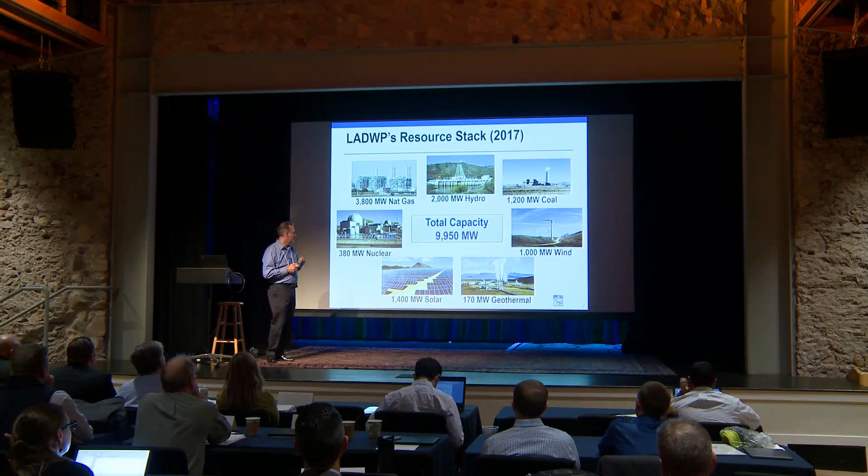Los Angeles LADWP, this is our resource stack here. We have lots of natural gas. Most of our natural gas is in our basin. 4 facilities that we have, 3 of which are along the coast, 1 is inland. And we also have a gas plant in southern Nevada.

The hydro is made up of our Castaic pumped hydro facility, which is a 1,250 megawatt pumped hydro facility. We also have a share of the Hoover Dam, 491 megawatts, and the balance being small hydro on our aqueduct system on the eastern watershed of the Sierra Nevada range. We have 1,200 megawatts of coal.

We did have another 470 megawatts of coal before 2016. We divested of our Navajo plant, so now we have our remaining facility. It's two 900 megawatt units. We have 1,200 megawatts of it currently. That's in Utah. We have 1,000 megawatts of wind. Most of that was procured prior to 2010.

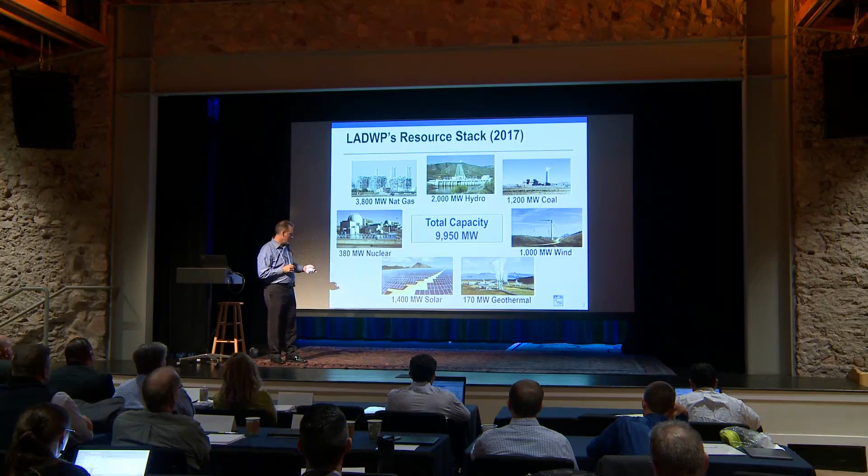170 megawatts of geothermal. Solar has really ramped up this last year. We've added close to 800 megawatts just this last year. And then, of course, our Palo Verde facility here that we have a share of. So this is our transmission and our resources.

Currently, we have about 25% of the California state's transmission. It's outsized compared to the size of our system, which is about 10% of the California load. And we have 2 major HVDC lines, one of which we share with other utilities, goes all the way up to the Columbia River Gorge. Up here we access low-cost hydro resources and wind projects.

We have our Intermountain, on our STS HVDC line here. We have our Intermountain generating station here. We upgraded it in 2011 about 480 megawatts so we could bring some additional wind in here. So we have the Milford, 2 projects there, wind, and also a Pleasant Valley project in Wyoming that we get wind power from. This was our Navajo station that we divested of in 2016.

Hoover Dam, Copper Mountain. This was our first large solar facility that we got experience from, 210 megawatts. And then we had the Moapa Solar, which is on the Indian Reservation, and that's 250 megawatts. Palo Verde is down here.

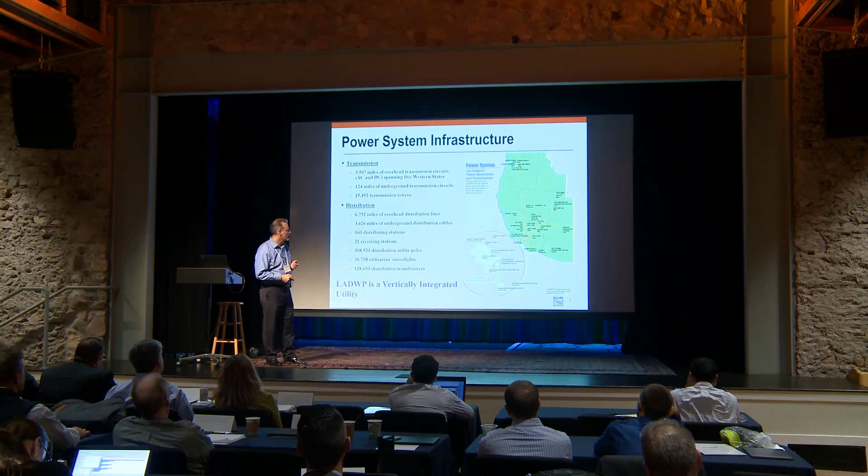We have about 4 million residents in Los Angeles, about 1.4 million customers. About 200,000 of those customers are low-income customers, which have a subsidized rate of electricity. And we have lifeline customers that have health reasons that need electricity. So we have a large number of low-income customers.

These are our major initiatives to reduce greenhouse gases. So we're doing all this renewable stuff really to reduce greenhouse gases. The SB 32 bill required GHG emissions to be below 40% by 2030. That's 40% below 1990 levels.

Our renewable program, we're planning to reach 36% by 2020. The requirement is 33% currently. By 2030, we'll be reaching 55%, which is 5% more than the current SB 350 requires, which is 50% by 2030. And we decided for a stretch goal, aspirational goal of 65% renewable by 2036. And that was something that we self-imposed.

We went out to our stakeholder community. We go through an IRP process every year, and we produce an IRP every year, and we go out to our stakeholders through an advisory committee and also a public outreach process that we do every other year. And we decided on a 65% RPS, primarily to reduce natural gas usage. I'll talk a lot about that in a little bit.

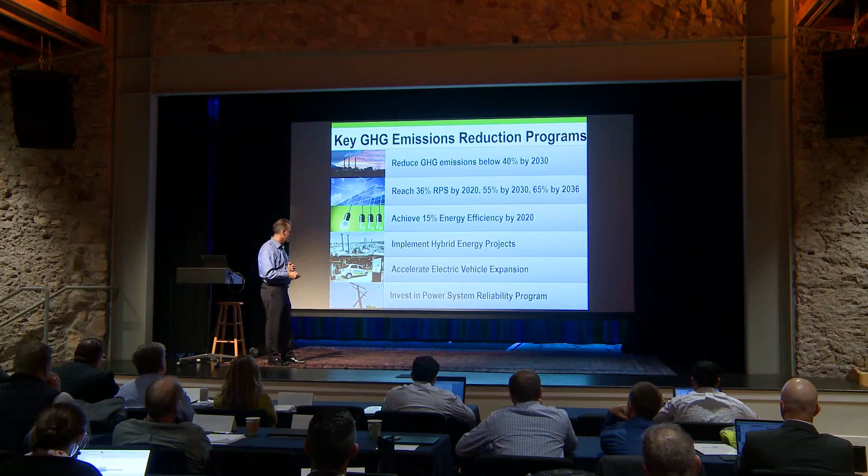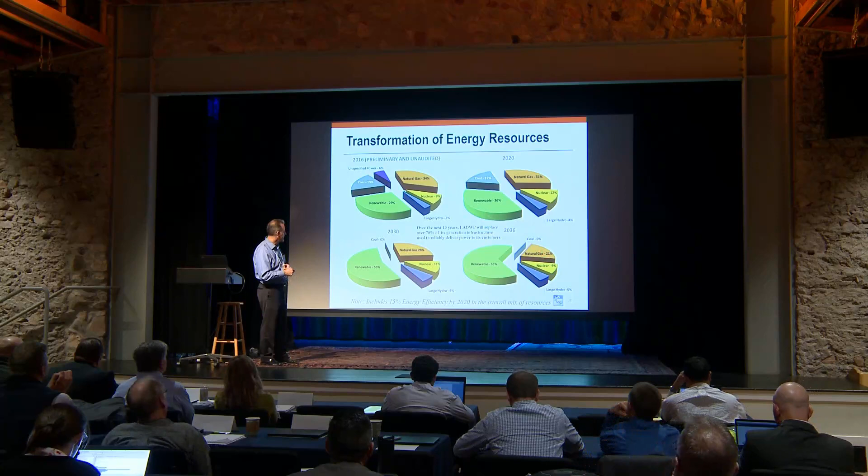By 2020, we're currently at 29% renewable here, 34% gas. And I talked about the 55% and the 65% by 2036 here. Our goal is to reduce our gas usage. And so you can see with the increased renewables that we can get down to 21% of our resource mix with natural gas.

The major laws that are driving all of this transformative change. AB 32 is the California Global Warming Solutions Act. It established a cap and trade program for emissions and credits. We've been participating in that, and we got a free allocation of credits based on our projections back in 2010; if we fall below our allocation, then we have extra credits that we can then sell into the market. So it's a market-based program to reduce fossil greenhouse gas emissions.

Currently, we're at 42% below 1990 levels here, and we're buying short-term credits. But now that we've divested of our coal-fired plants, we now have extra credits.

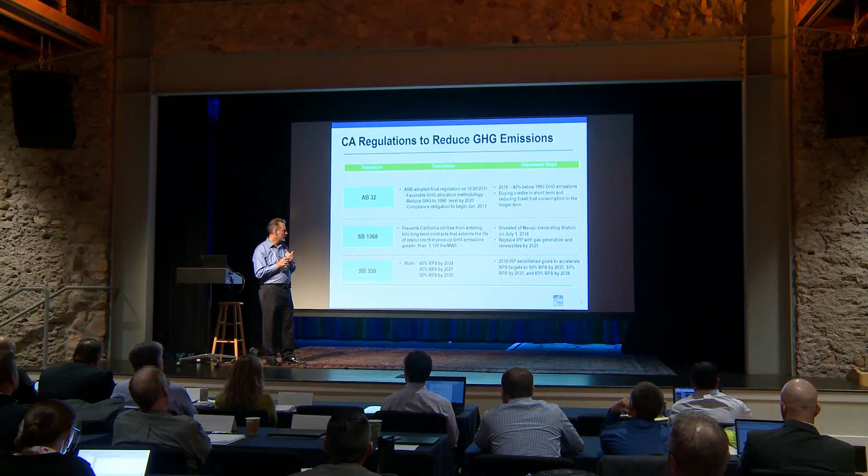SB 1368 prevents us from importing power outside of our system into California if it exceeds 1,100 pounds per megawatt hour of greenhouse gas emissions. That was the major reason why we had to divest of our coal-fired facilities. We decided to accelerate the replacement of those from 2027 for IPP to 2025, and from Navajo Generating Station 2019. Our contract ended in 2016.

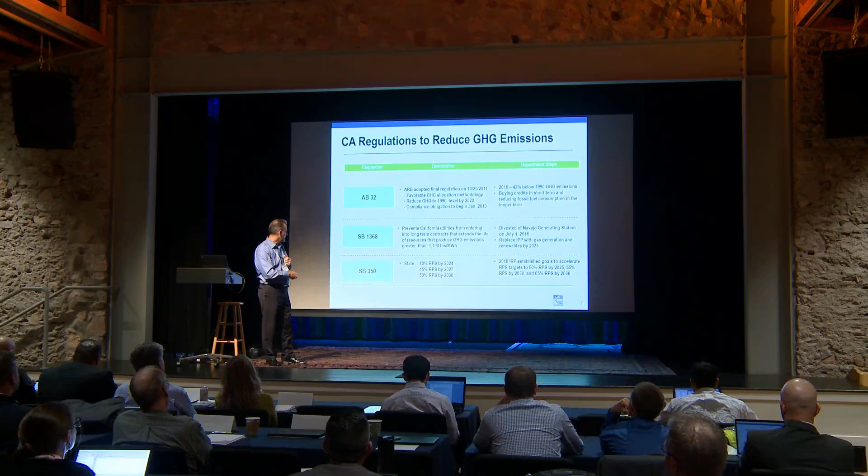And then SB 350 here, we talked a little bit about. So that establishes the 50% RPS by 2030. SB 32, 40% below 1990 levels. We're at 42%, 14 years ahead of it. And this last one here, somewhat related to SB 100, but our city council put forth a motion directing us to determine what investments would be necessary to get to 100% renewable, clean energy.

And we formed a technical vision team this past year. We kicked off a major stakeholder process. Now we're involved with NREL in research projects and talks right now to look at 100%. So that's our long-term goal, is 100% renewable.

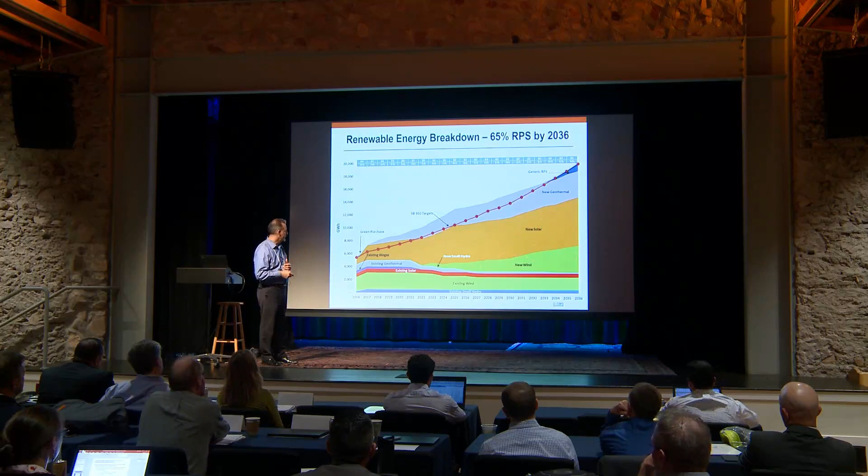This is our renewable energy breakdown, so 65% by 2036. SB 350 stops at about 50% in 2030, so we're going beyond that point. And you can see we have a very diversified mix. We think this is very critical from an integration standpoint, to have a very diversified renewable mix, with diversity in technologies, and geographically dispersed over a wide area.

Our solar programs: we're looking at 4,000 megawatts of solar by 2036. Most of that is large-scale PPA projects that we're putting on our system. Our local solar here is a big contributor. This is the DERs we were talking about earlier. 760 megawatts of customer net metered. We're currently at about 250 megawatts right now. So we have a ways to go, and it will allow net metering to continue in the future.

We don't see extremely high growth rates in net metered solar, primarily because our rates are low. They're among the lowest in the state of California. And also the fact that we're a very dense city environment, urban environment, and it's difficult. Most of our customers live in multifamily dwellings, so it's very difficult to put in net metered solar.

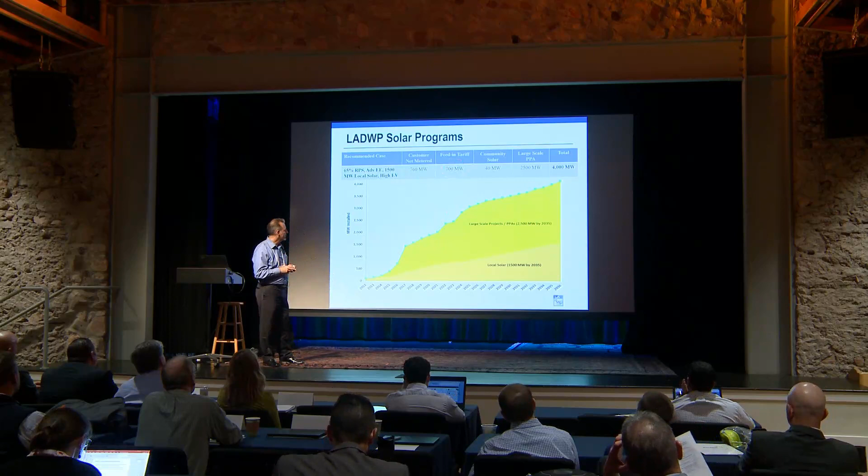We have a feed-in tariff program, so these are basically small PPAs within our territory. And we're looking at expanding that program. Right now it's about 14 cents that we're offering to our customers for that solar.

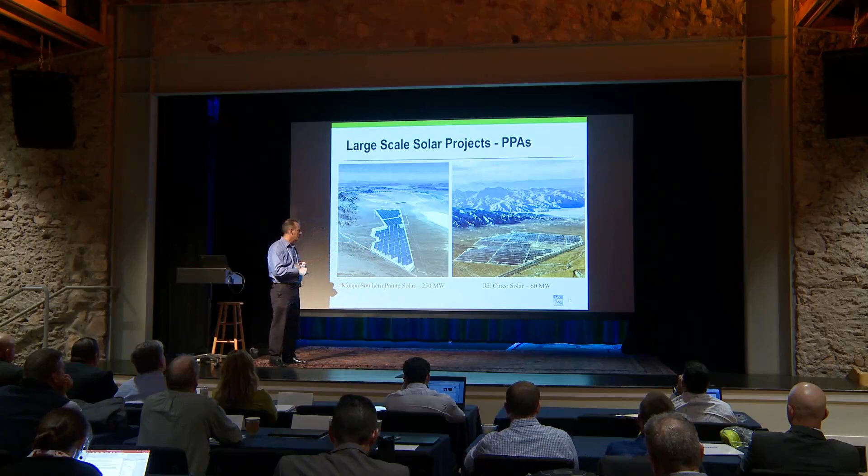So here's our Moapa facility. This is a 250 megawatt project we completed several years ago. RE Cinco Solar, 60 megawatts. This is part of a larger group of facilities in the Barren Ridge area, and I'll show you in a minute. There's about 590 megawatts planned right there currently.

This is the largest feed-in tariff project, we believe, in the world. It's down in the harbor area. I believe it's 30 acres, and it's 15 megawatts AC, the Westmont Solar Project. And I think we offered 13.5 cents for this one.

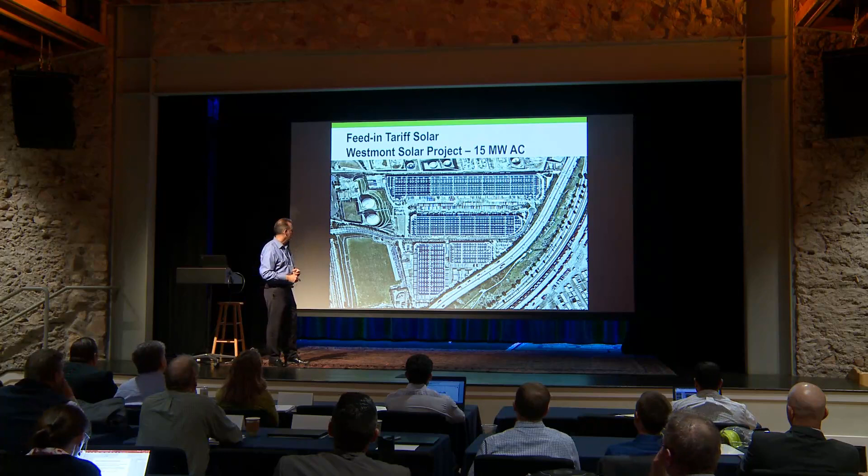So we've been studying renewable integration for years. In 2013, before we saw SB 350 coming out, we were starting to look at 33%, 40%, 50%, looking at those different levels of renewables and what the impact on our system would be from increasing penetration of renewables. There was very little information out there at the time. There were some NREL studies out there that we took advantage of and started to learn from.

Data was very hard to come by, so we had a 50 megawatt facility, Copper Mountain 1, I believe it was, to analyze the variations in that plant.

What we came out with was that a large solar plant, greater than 50 megawatts, is unlikely to experience a bigger than 36 megawatt drop or variation in its output within 1 minute. That was kind of a key finding.

We also learned from the NREL studies that if we spaced our facilities out about 50 miles apart or more, they would have very little correlation between fluctuations in the output of those plants. We were concerned that having a whole lot of plants all together would be creating a lot of variation in our system. Geographic diversity is important, aggregated solar production.

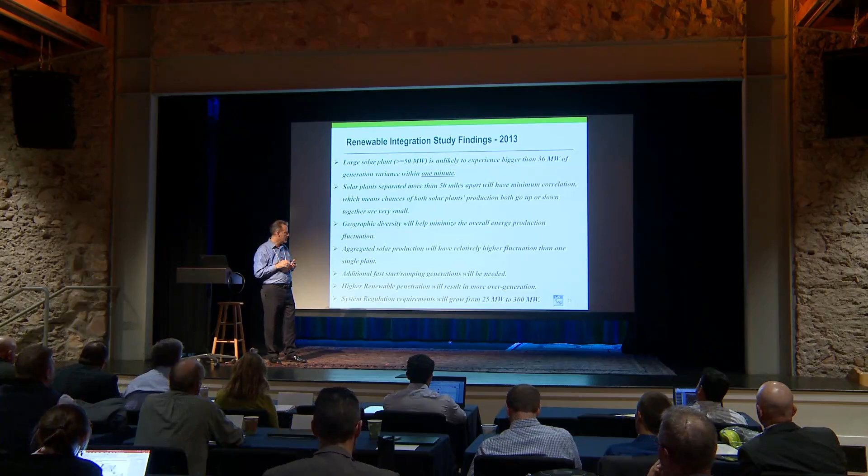And then we need fast starting ramping generation. So we repowered 2 of our units with LMS 100s. We put 6 LMS 100s. After that, we did a subsequent repowering and put in 2 more LMS 100s, so we have 8 LMS 100s. Those are very quick starting, fast ramping combustion turbines. We also put in a combined cycle. It's a very flexible 1+1 unit.

And we learned from that earlier study that our system regulation would grow from the current 25 megawatts to about 300 megawatts. That was an hourly study, so we later followed up with a more detailed sub-hourly study, looking at the inertia and the response on our system, to see that we could go to higher levels of renewables without causing reliability issues.

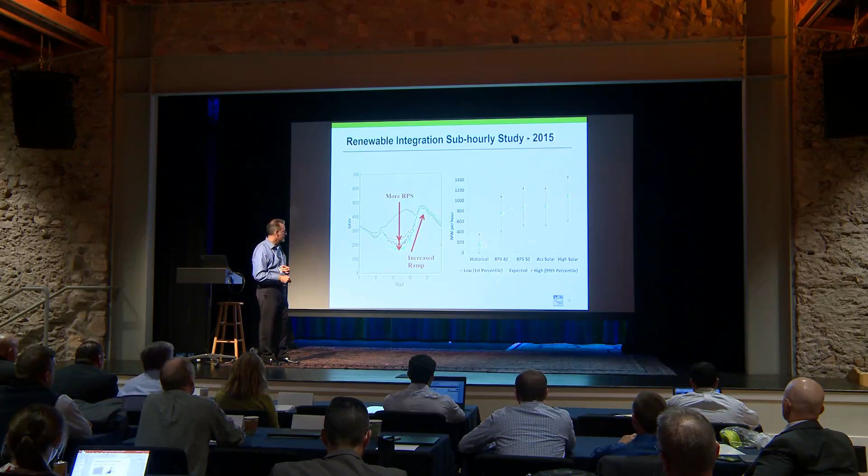And we did find that there was much more fluctuation in the middle of the day, primarily from more solar. This one here was at a 50% RPS, 40%, and 33% here. We found that our ramping rates would go from about 100 to about 750 and onwards, depending on how much solar was put onto our system.

In 2017 we experienced a big drop in one of our facilities. Instead of spacing our facilities out 50 miles apart, we actually put 590 megawatts all in the same area. And so I kept pointing back to our early study and said, hey, this is going to be a problem. You're going to lose 70% of that plant's output within 1 minute. And sure enough, it happened.

In this example, this was Copper Mountain. We experienced this one earlier, but recently we experienced about a 400 megawatt drop, and our operations became very alarmed with that. So operations decided to hold back 400 megawatts of flexibility reserves on our system so that they could respond to these disturbances.

So together with the 400 megawatts of flexibility reserves, we think going forward we can handle just about any additional solar, since it's pretty much limited to a certain amount of variability. As you put more facilities online, it really doesn't get that much worse.

And together with the RBC, that's the reliability-based control standard that WECC has. How many of you utilize that on your system? Nobody? So instead of the CPS, Control Performance Standard, it allows us some flexibility in the range of how we operate our ACE.

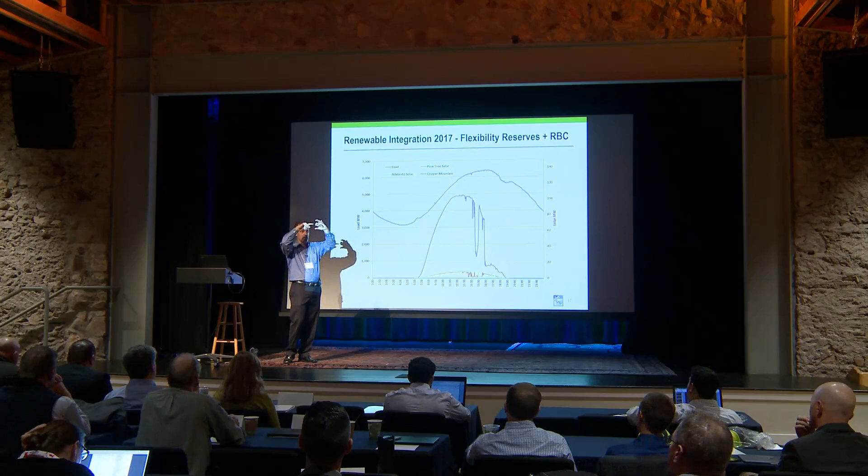We can put units online, and then there's that band that we can operate within. So the ACE is following around inside this band, and we don't have to move our units. But if it goes outside of it for more than 30 minutes, then we put on generation, and we can operate within this area. And then if the solar drops, we can turn the units off and continue within that band.

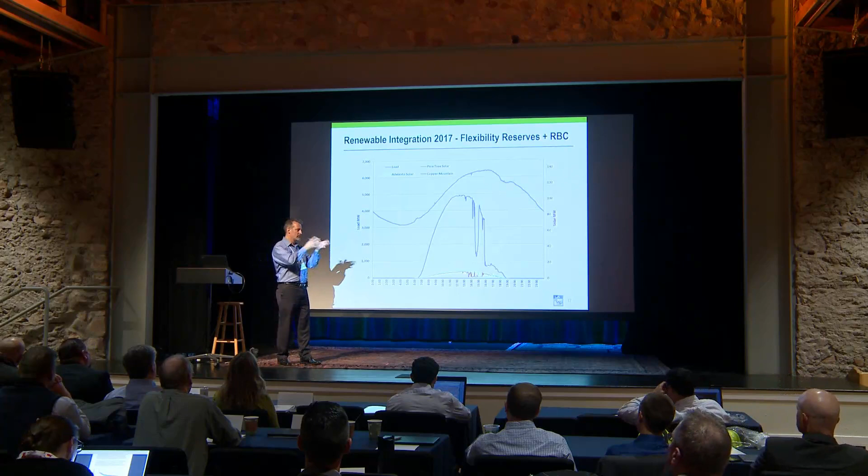So that's been very helpful, taken away a lot of our concerns that we had in the very beginning years, where we felt like we had to have generation that just followed the solar profile, variation on a continual basis.

So resource adequacy. So we discovered that the traditional approach that we were using, which was looking at the peak load during the day here, we were determining our dependable capacity, planning out into the future based on this peak load. With the solar coming online and the wind, we saw that it was slightly changing here, shifting over. Using our planning process, we were able to show that in 2032, as we have more solar on our system, this net peak load shifts into the evening hours.

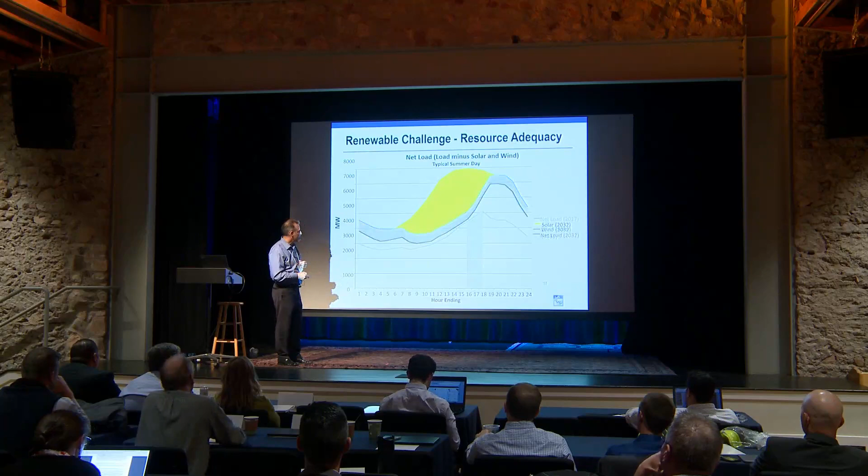So what we were planning for solar was about 27% dependable capacity for our solar plants. Once we started looking at it in this manner, in the net peak situation, this is what our dispatchable generators have to respond to. When we looked at that, then solar really had no value, no capacity value. So that was a major change in how we determine our resource adequacy.

This is going forward over the next 20 years, our dependable capacity breakdown here. So this is our peak load forecast plus the required reserves. So we're a balancing authority, so we have to have spin and non-spin as part of our contingency reserves. On top of that, we need to have replacement reserves, so we have to be able to back up the contingency reserves after an hour. So adding those two together is this top line here.

Here's our capacity shortfall, so we monitor this over time. We're not too overly concerned about this here because load forecasts change, and so this might go away. Demand response is a big part of it, so that's 500 megawatts. So that's one of the programs that we're looking at, how that develops and whether we can truly get 500 megawatts out of that program.

Energy efficiency supplies a small amount. You heard about targeted energy efficiency. So we're looking at trying to develop, emphasize programs that can replace capacity during those peak hours in the evening time.

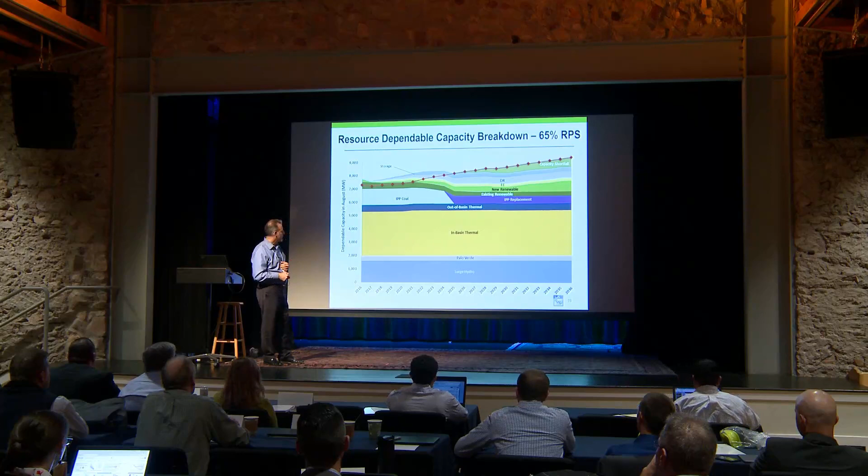Transmission upgrades. So one of the biggest challenges we're facing is upgrading our transmission lines to put all these renewables online. This was a major project here. We increased our capacity here to 2,200 megawatts from 450. This is one of the largest, I think it is the largest renewable corridor, if you want to say that, in California. And it's right outside of Edwards Air Force Base here. You have the city of Mojave. Kern County is here, and Los Angeles County is here.

So we built this Barren Ridge switching station. As soon as we built it, we had all of our queues for our transmission requests filled up immediately. We also built this new Haskell Canyon switching station down here. We reconductored, added new transmission lines. We upgraded the line from the Castaic power plant here. What we did not do in the first phase was increase the capacity from this point to Los Angeles. So now we're in that process right now of upgrading those lines.

So we have about 590 megawatts of solar, all within about a mile of each other up here near the Barren Ridge switching station. That's part of our Beacon Solar plant.

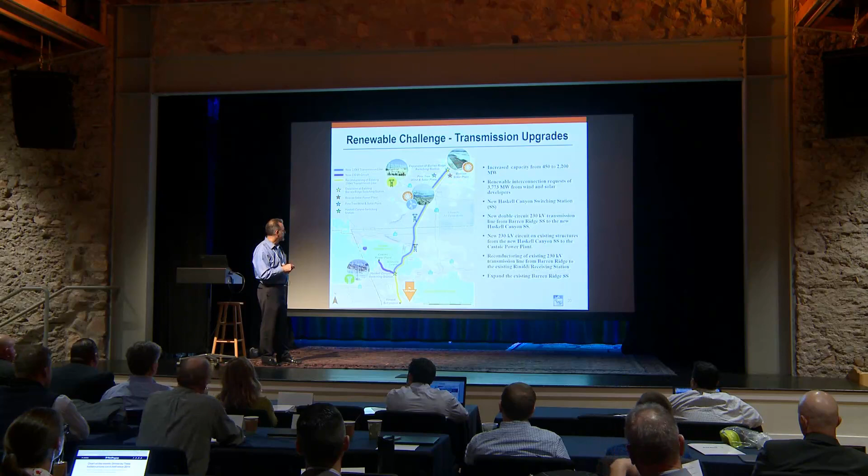So California requires that we report our energy storage targets. We decided to report, and one of the requirements was cost-effective energy storage. So we determined that we could put on 154 megawatts of additional energy storage on top of what we have at Castaic, the 1250. And this would be primarily batteries on our generation, transmission, distribution, and customer system here. So these would be DERs here, our customer sites, distribution system here, also DERs.

Here's one of our projects. So we just approved a 20 megawatt battery installation. This is a power battery that's tied to our system. It's not tied to the solar plant. And it will provide regulation services, load balancing, system balancing, and so forth. And so that will help us stabilize that transmission corridor there.

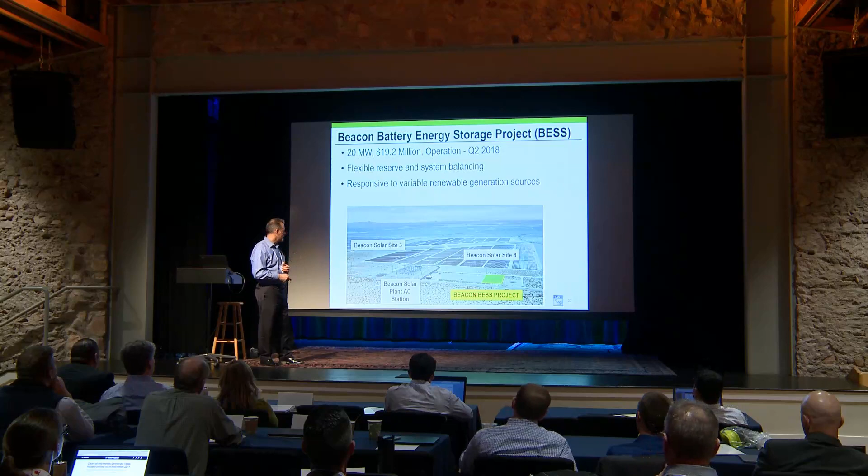Here's a distribution station. So everybody hear about Aliso Canyon? Yeah, so Aliso Canyon was the largest methane leak. It just happened to occur in our backyard, in our territory. Had the largest methane leak, I think, in history. That created a real outcry from our public, our customers, to reduce our use of natural gas. One of the things that we did in response to that was, at one of the distribution stations near that area where that leak occurred, we're putting in battery energy storage.

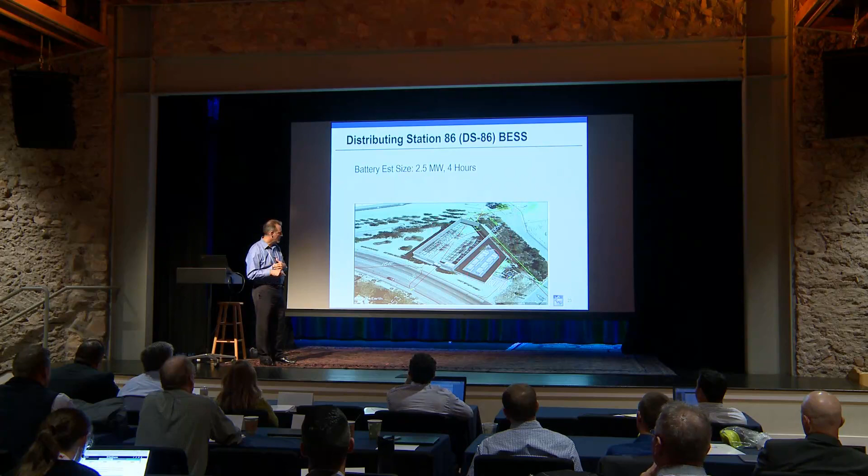We're also pausing our repowering plans because now our customers, environmental groups, and our politicians are questioning, well, why are you repowering, putting in new gas-fired generation when you're putting in a lot more renewables? Do we need to continue to put this gas-fired generation in place? So now we're studying that, looking at power flow issues within our system, and looking to see if we can use DERs, distributed energy resources, to supply some of that replacement energy and capacity.

We're also looking at batteries, so large, approximately 100 megawatt batteries close to our generating stations. I was surprised that a 100 megawatt battery fits into about an acre and 3 stories, with the middle story being basically all the controls. So I was surprised that they could actually put it in such a small space. I thought before it would be 10, 20 acres, something like that. But they're getting much more compact. So we're looking at that as possibly to replace some of our gas-fired generation.

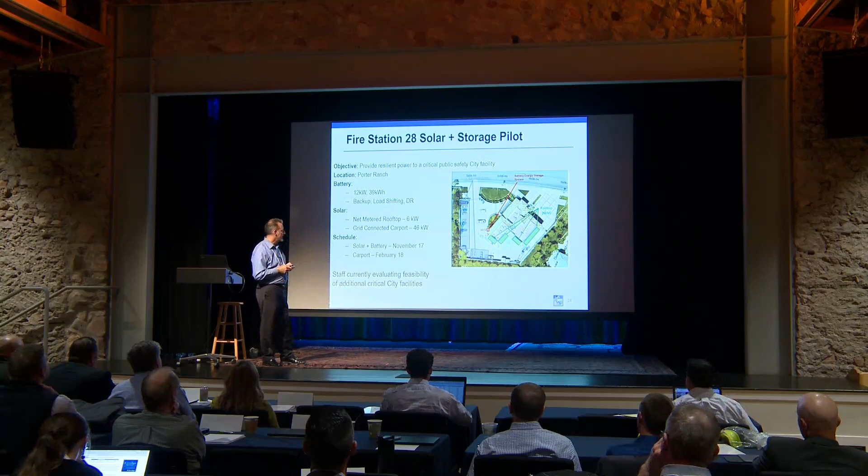This is a small talk about resiliency on our system. So we're putting battery systems with some of our critical public safety facilities. Fire Station 28 here is one example. We're putting in a battery energy storage system there together with rooftop solar. And that's sort of a test case, to see if we can then do that on other city facilities as well.

So 2018 and beyond, our big concern is minimizing curtailment of renewables. Originally, we thought curtailing renewables would be cost effective. Later, through more analysis, we found that not only do you lose the energy from the PPA, let's say you have a $40 solar, but then you have to replace that energy, and that's where it gets expensive. So we find that using battery energy storage co-located with the renewables, we can absorb most of that overgeneration and curtailment that we would have to do on our system.

We are also looking at optimizing tariffs and incentives for distributed energy resources and employing DER management systems to deploy these resources, and then increasing our energy trading between our balancing authorities, between California ISO and LADWP, through the energy imbalance market, which is a 5-minute market, to better utilize our resources and take advantage of other opportunities in the market, and providing long-duration energy storage.

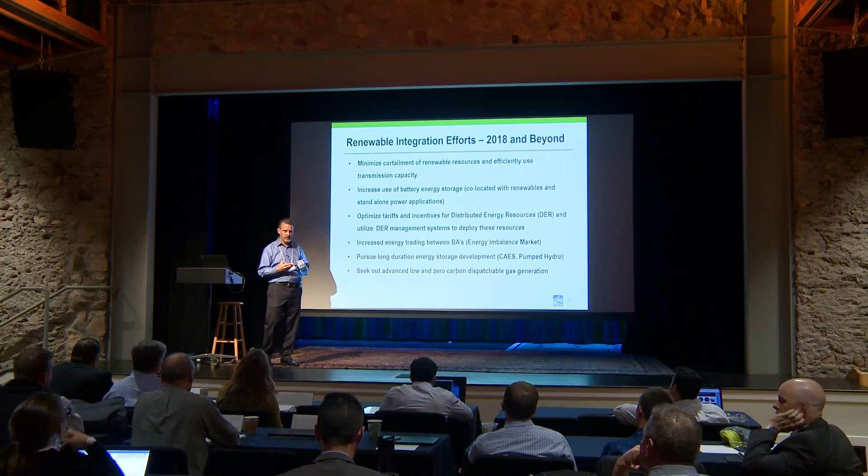So we're looking at a small project there, and also looking at possibilities of additional pumped hydro facilities. And we're looking at low and zero carbon dispatchable gas generation. So in the future, and this is a lot of the research that's going on, we're trying to figure out if we can use hydrogen in our gas turbines in place of natural gas.

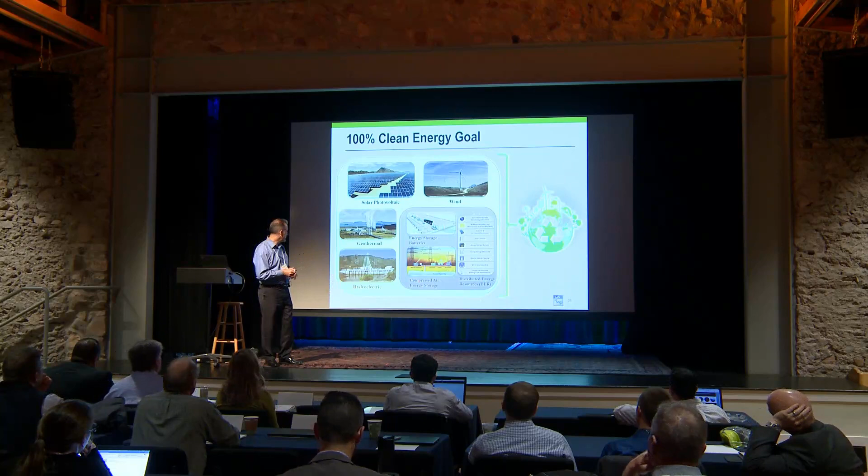So here's our 100% clean energy goal. Here's our DERs contributing to that. Compressed air energy storage and batteries will be a big component. And then we have our resources that we have currently. We'll be increasing that in the future. So our record peak day here. So we're having discussions with our major stakeholders, with environmental groups, about why do we need this gas-fired generation?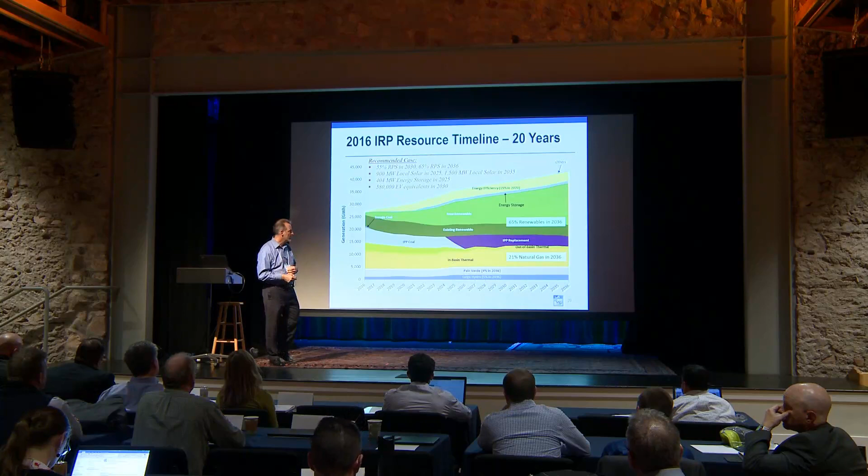Any questions? Yeah, you had mentioned that you found that curtailment wasn't cost effective, that batteries was a cheaper option. Can you talk a little bit more about that? Yeah, so what we're finding, and this is very recent, it actually was a surprise to me, but when my analyst showed me, said, look, it's more cost effective to put a 4-hour battery at more than 50% of the nameplate capacity of the solar project, and together it's more cost effective. There's a big savings in reducing curtailment to zero.

You also have additional capacity. So now the solar that had zero capacity in the evening time now has the full capacity value during that time. So that has additional value, which we consider. And the integration cost of having solar that's basically load shifted into a sort of a base load product from the daytime to about 4 hours into the evening, and you can actually extend that even longer at a lower capacity. You can extend it for 8, 16 hours, whatever you want to do. That has a low impact on our integration costs.